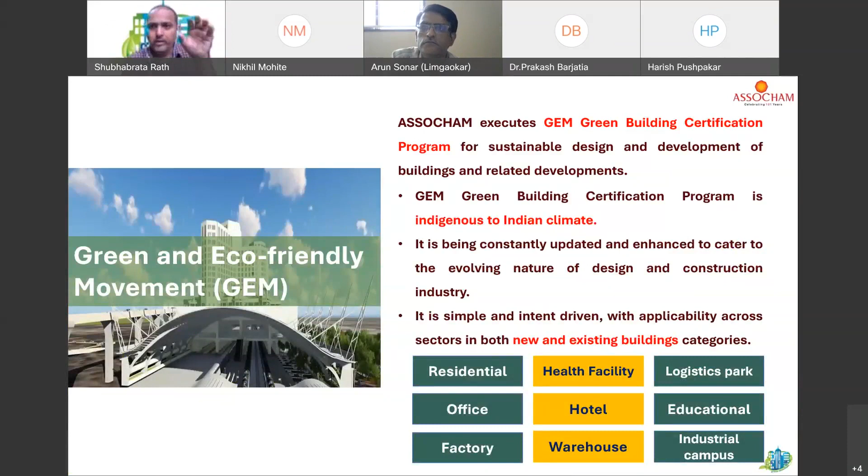Why are we trying to do it? What is the impact of energy in it? I will come to that part in a while. It is compliant with ECBC, the Energy Conservation Building Code, an Indian indigenous code, a very good guide for all of us. The 2017 edition, the latest one, along with the National Building Code 2016, helps us implement green building sector standards in sustainability, energy and water efficiency.

You can see there is prominence given to the second part - fire and life safety, more green area, human comfort, fresh air. Even fresh air has a connection with energy, directly or indirectly. Indoor air quality is the same thing, and even daylight has a connection with energy. So energy is everywhere - it's about optimization of nature.

The United Nations SDG goals also place a lot of emphasis on this, and GEM is being continuously improved to align with the United Nations SDGs 2030, with energy being a part of it.

The GEM green building advantages - like I told you, it is an indigenous program by a century-old apex industry chamber. GEM is the first indigenous program based on ECBC and NBC. It is an affordable certification program, at least 30% less than other existing programs in our nation. For sustainable buildings, any extra cost you pay can be recovered in 3 to 4 years, with additional costs of 6 to 10 rupees per square foot maximum. There are also regular interactions between GEM and project teams, even post-certification.

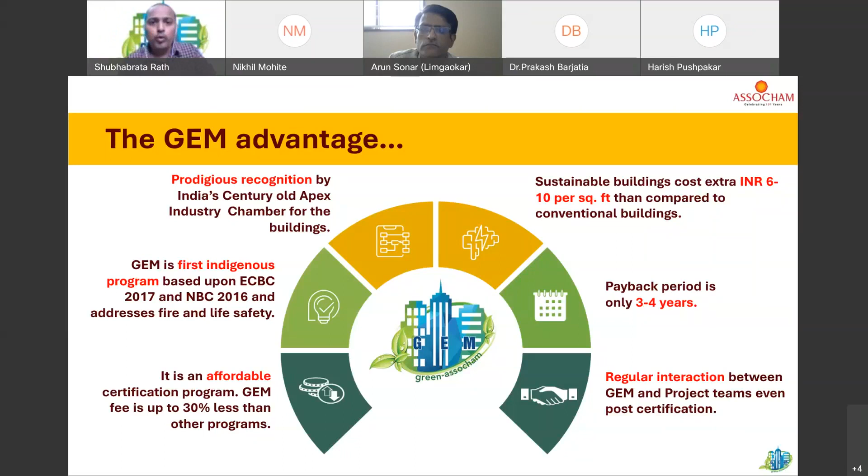That's what we are committed to for everyone going for this certification. It is listed by CRISIL Green Building Rating Agencies. We have GEM level certifications for different requirements, GEM 1 to GEM 5, and energy - I won't go into that detail - but there are a lot of principles in our program directly related to energy audit and commissioning. We recognize energy audit as a need of this hour.

So ASSOCHAM's GEM Green Building Certification Program has been empowered with Rajasthan Building Bylaws for extra FAR incentives, and some other states are also coming up in the near future.

So the certified green projects - we have a lot of projects across diversified sectors, maybe hospitals, hotel industry, office industry, residential programs. There is DoubleTree Hotel, Times Square Mall, PVR Cinema Hall in New Delhi, all GEM certified. I can show successfully delivered projects.

This is a glimpse of illustrative projects - healthcare, a green school, land port terminal at Kartarpur. It's not only a diversified portfolio in terms of types of buildings, but also diversified in terms of locations in India. We can do this everywhere because energy is not confined to cities only - it goes into all details of our life, all sectors and places, in all states, and even in villages.

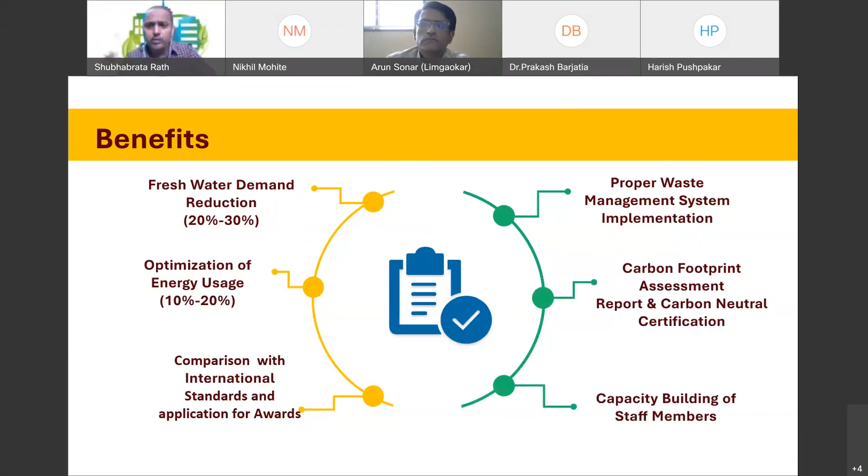So we have the benefits of all the audits, not only energy audits, any sustainability audit, we call it green audit for universities. In the green audit, we have waste audit, water audit, carbon footprint audit, and energy audit. All this helps in certain ways, tangibly and non-tangibly, both ways. We have a pledge, PM Modi made this pledge, that let us all pledge to create a green and environmentally sustainable country. Of course we should, and that's what we're trying to get at.

Typically, energy audit consists of identifying and developing modifications in the current energy consumption scenario of the building. Our aim is to reduce the energy use and cost of operating the building. Our goal of energy audits is to improve the energy performance of the building and reduce consumption of fuel and electricity that we use in our residential buildings.

Energy audit, or energy analysis, is the first step to making our commercial facility more energy efficient. Normally when we conduct an energy audit, we can either do it at a more broader level, or we can go in depth. As we perform more and more measurements and go more in depth, we can find more solutions to conserve more energy.

At the end of the energy audit, we try to find the conservation measures, and these conservation measures are normally low cost or no cost options, or maybe capital intensive.

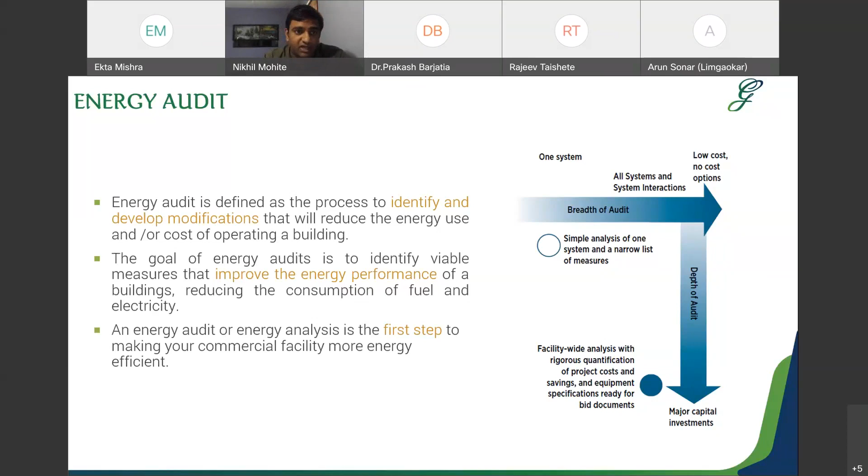The energy utilization index is first - during the energy analysis of buildings, we try to get historical data of the building and understand how the energy consumption of the building is. To understand the historical performance of the building, we try to use the energy utilization index, which is against the energy consumption.

We try to use influencing factors such as square meter of the building, or factors which have effect on the energy consumption of the building, such as outside temperature. We try to map the energy consumption of our residential building against this influencing factor. That is called the energy utilization index.

When we say that buildings have the same energy utilization index, that means two buildings are compared with respect to the climate and with respect to the square footage of the building. So these are the energy utilization indices we use in comparison of the two buildings, and we can say who has more energy consumption, and compare the two buildings.

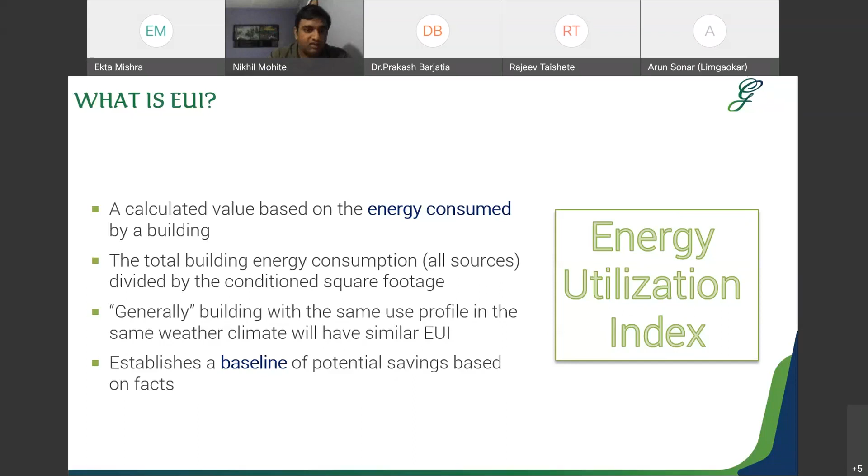Key elements to performing an energy audit: the first is benchmarking and analysis of the historical data, and the second is breakdown of energy use and analysis of the end uses. So in the initial steps of the energy audit, what we do is try to understand the type of the building, the principal use of the building.

If the building is used for 8 hours or it is used for 24 hours for residential purposes. What are the different types of energy sources that building is using? What are the different types of energy uses that the building has? What are the different costs associated with the energy uses?

These kinds of questions we come up with when benchmarking and analyzing the historical data, and then we try to understand what are the design conditions and the actual operations. We try to compare the design conditions and the actual operations, understand the operation and maintenance procedures in the first step, then compare it with the baseline. This is the first step about benchmarking analysis of the historical data.

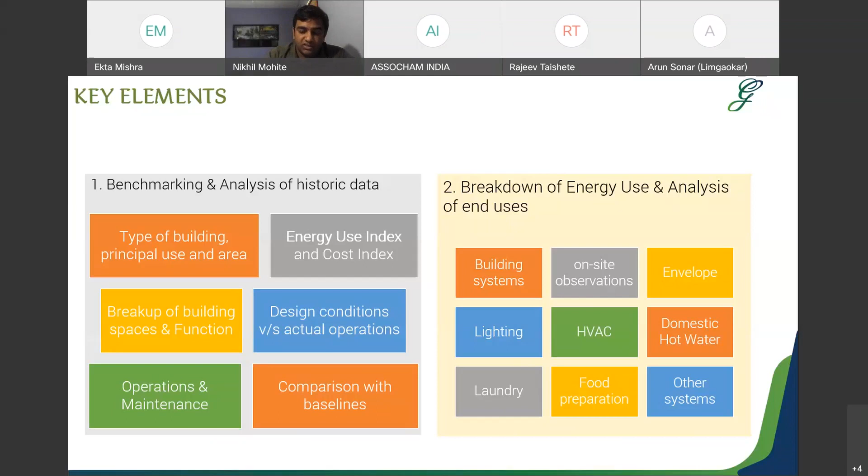We try to analyze, break down the energy usage of the building. And the third, well, energy audits, engineering and the economic analysis.

So once we have identified the historical data, then we have identified the breakdown of the energy consumption, then we go to the data analysis, and after analyzing the data, in the energy analysis we try to get information about the present energy use, and we also take into consideration the cost of the energy sources.

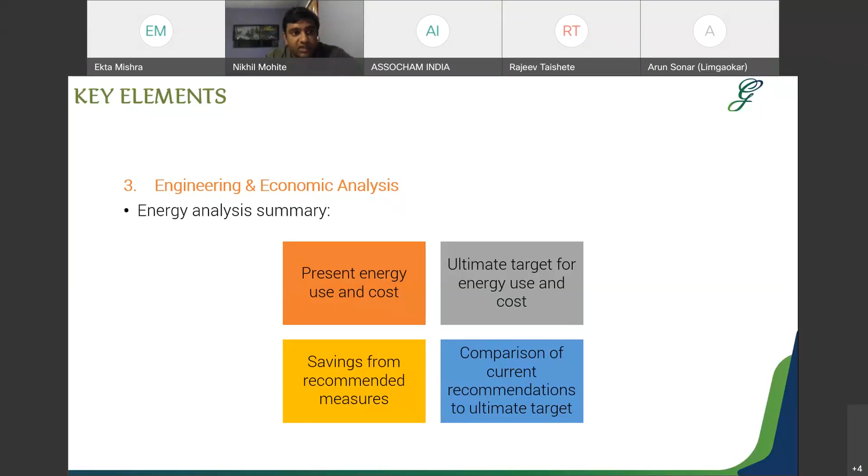So our ultimate aim is energy conservation, and we try to estimate the energy savings with respect to the energy efficiency recommendations.

So there are several frameworks that are available for conducting energy audits, such as ISO, International Standards of Organizations, then Bureau of Energy Efficiency from India, and ASHRAE Building Energy Assessment Professional, ASHRAE Building standards.

These standards have their own guidelines for conducting energy audits which we can use. For example, in the ISO 50001 energy management system family, the separate standard ISO 50002 is given to identify and has given the guidelines regarding conducting the energy audits. So there are several steps which we can follow, and we can conduct the energy audit as per ISO 50002.

Bureau of Energy Efficiency has also given certain guidelines regarding the energy audits, and the framework which Bureau of Energy Efficiency has given is that they have identified certain designated consumers, such as the manufacturing industries, and identified them as designated consumers.

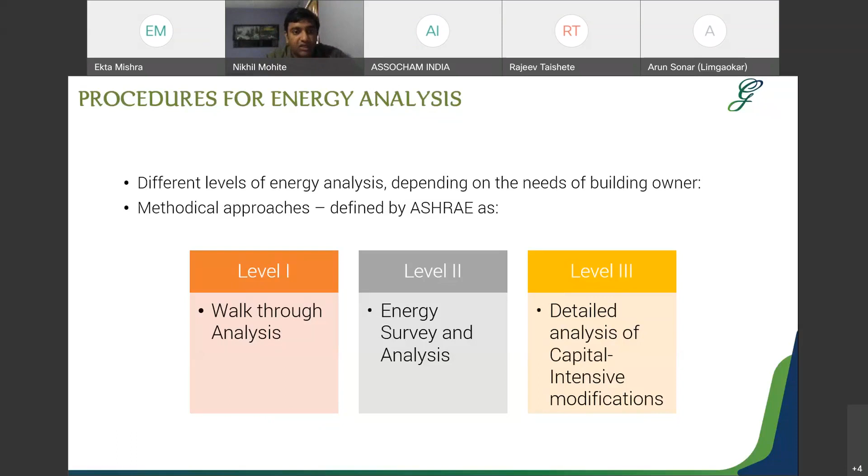But level 1 gives input that can be used in level 2, and level 2 inputs are used in level 3 energy audits at ASHRAE. So we'll try to understand in detail what level 1, level 2, and level 3 are.

As I mentioned, for each level the energy audit process is the same. So initially, we will try to review the utility data.

Before visiting the site, we'll try to examine the utility data regarding energy consumption, mainly from the energy sources used in residential buildings, such as electricity or diesel consumption. We'll try to get this information for as long as 3 years to understand the energy consumption pattern of the building. The more data we have, the better we'll understand the pattern of energy usage and the changes happening in energy consumption on a broader level with respect to energy sources.

Before visiting, we'll also try to get information regarding the single line diagram or the building systems diagram, and find out how the building was designed or how it is currently used. With respect to the single line diagram, we'll try to understand the energy sources, the energy consumption, the energy consumers at the demand side, and how energy is distributed in the building.

So for level 1, level 2, or level 3, the first step for each is the preliminary review of the utility data. On the right side, with respect to the initial energy review, you can make a graph with different categories such as interior lighting, cooling, heating, exterior lighting, and fans. You can use such categories to analyze the initial data.

The second step in each level is the site assessment. Once we are done analyzing the initial data, we visit the site, and in the physical assessment of the facility and operations, we try to meet with the key operations and maintenance staff. The complexity and depth of the site assessment depends on whether you are conducting level 1, level 2, or level 3.

Level 2 will be more focused on the equipment side, and we'll try to get a different view on equipment usage. We'll try to collect data with respect to energy consumption, such as energy measurements for the equipment. While doing the site assessment, we also get the construction details of the building envelope.

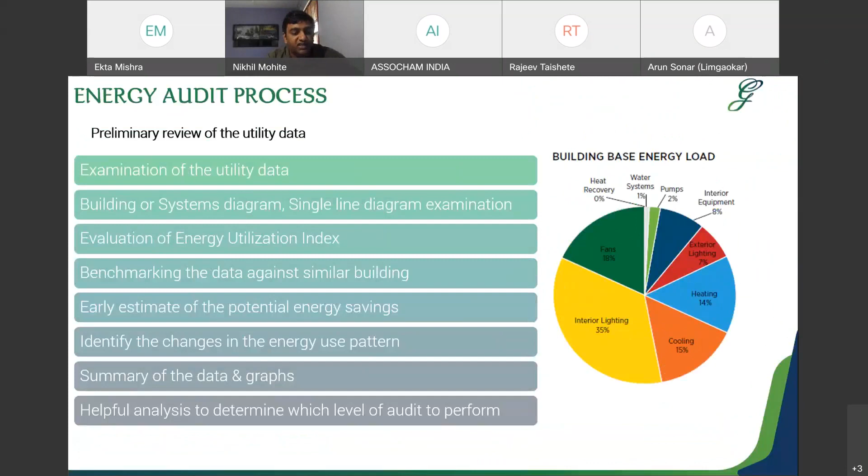So after review of the utility data site assessment, we go and do the data analysis. Once we have the measurements, the data monitored, in the second step, we come back and we do the data analysis and we try to find out what is the performance of the actual building.

So the performance related with the equipments that the building has been using. In this case, what we do is we try to understand the performance of the chillers, pumping systems, or the fans, and we try to understand the efficiency. If we calculate the efficiency of these equipments, we compare these efficiencies with the rated parameters, so what exactly we are getting.

So energy audit data analysis is nothing but what is coming in and what is going out. For most equipments, what is coming in is the electrical energy, and what is going out, such as in case of pumping system, is the hydraulic power. When we talk about the fans, what is coming in is the electrical energy, and what is going out is the fan power, air power.

So in this way we can analyze the equipments, and we calculate the efficiencies of these equipments, and we compare them with the rated parameters, and we try to find out different ways of conserving energy with respect to these equipments.

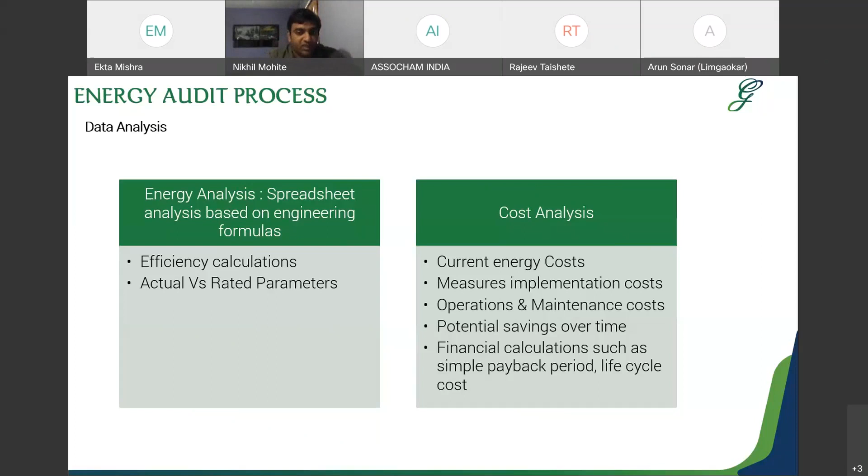So the last step for the energy audit is preparing the energy audit report. Once we are done with the data analysis and preparation of energy efficiency measures, the identification of energy efficiency measures, we try to put everything in our audit report.

And we talk about the future, what kind of steps the building owners has to take to meet the energy saving and financial goals. So we give the summary of building's current condition and energy use, and this will be coming from our initial preliminary analysis.

And then we discuss about the list of recommendations, energy saving recommendations with respect to low cost and longer term energy efficiency measures. And we also discuss about monitoring of the energy consumption, energy utilization in the future, how the building can monitor the energy consumption.

We have seen in the buildings also that many times buildings are only monitoring the energy consumption and there is no system at all. Whatever the building has, the building might have the system in place for collecting the data. They might not have automated data generation, but they have personnel working on collection of the data. So they will be only monitoring the energy consumption.

They are collecting the data, and they have the data for the last couple of years or 3 years, and there is nothing. They have not done any energy analysis with respect to that data generated, and they have not come to any conclusion, just because some company has advertised them about doing the data monitoring, they have been following this. So in the energy audit report, it is also important that while monitoring the energy consumption, what kind of energy utilization indicators to use, and try to understand the energy pattern of the equipments and come to the conclusion whether the equipments are running efficiently, or the building is running efficiently or not.

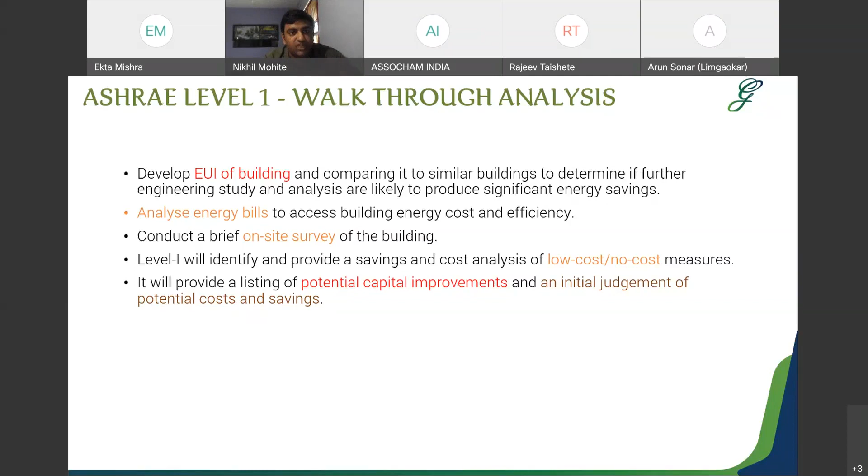In level 1 walkthrough analysis, we only collect the energy bills and try to analyze them. We conduct a brief on-site survey of the building, and we try to get the low-hanging fruits only - the energy efficiency measures which are low cost and no cost. This is only our initial judgment when conducting ASHRAE level 1.

ASHRAE level 2 is a little more complex, and this is where we go with the team and conduct the energy survey and energy analysis also. We try to break down the energy use with respect to different categories, and try to see which category has the major energy consumption, such as HVAC, lighting.

So when we categorize the energy consumption on a broader level, we get to know who has the significant energy consumption, and we try to attack the significant energy consumers.

In the ASHRAE level 2 audits, we also consider maintenance and operational activities, and try to understand different activities they are performing with respect to their energy consumers, and what kind of maintenance procedures can be modified or altered with respect to energy consumption.

Once we are here, we'll be conducting more detailed cost benefit analysis of the energy efficiency measures we have identified, in a more detailed way, and we'll also try to understand the operational maintenance activities for these kinds of measures.

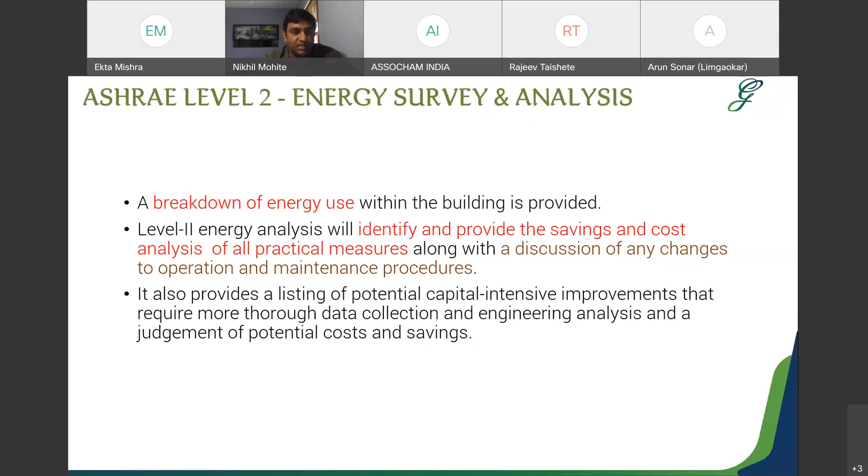Here we will not include, but we'll just mention the capital intensive projects which require more capital and more data to analyze, to come to the point that there are some energy saving opportunities. This input from level 2 we'll use in level 3.

So what level 3 is, is the detailed analysis of capital intensive modifications. Once we've identified a few capital intensive modifications, we'll try to monitor the energy consumption of certain parameters and equipment.

With respect to the capital intensive identification of the energy conservation measure, we try to understand the load, the energy consumption pattern - whether it's changing with respect to load, or how the energy performance of particular equipment behaves. That's how we do the capital intensive modifications to realize the energy saving opportunities.

We'll try to gather as much data as possible, and do the monitoring for a certain period of time. We'll get this data and then analyze it, and then come to the point of cost benefit analysis, doing the cost and energy saving calculations.

So this is a brief summary of the level 1 audit report, level 2 audit report, and level 3 audit report. In the level 1 audit report, as we can see, there is not much - it is only a walkthrough survey.

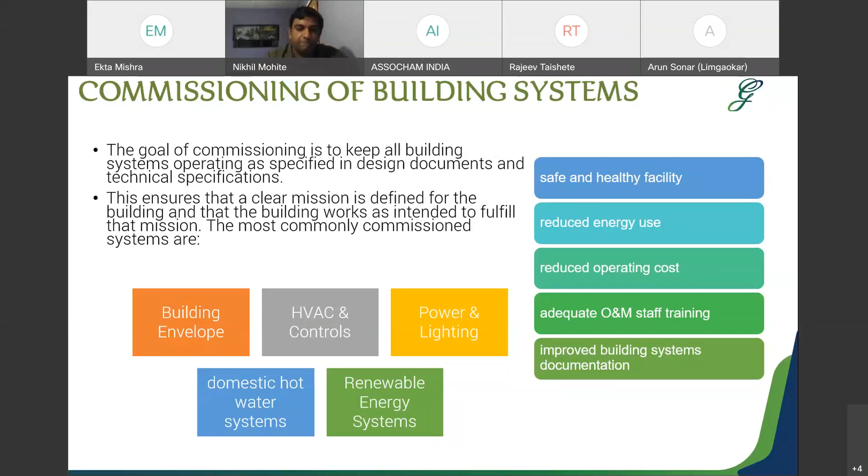And it also improves the building system documentation. Sometimes what happens is, once the building comes into use, after a few years there are lots of changes, and because there are lots of changes no one has really updated the documentation. When we do the commissioning of the buildings, we come to know what is the current scenario of the building against the design scenario from a few years back, and we can update the documentation.

Commissioning processes mainly include different types of commissioning: initial commissioning, ongoing commissioning, and retro-commissioning. The initial commissioning is normally done for newly constructed buildings.

It starts with the commissioning planning, and it starts with the basis of the owner's project requirements. So the owner gives the requirements to the design team, and then they prepare this basis of design, and then the actual process starts - the contractor comes into the picture.

They order the equipment that is required, and we do the startup procedure. So this process starts up, and then the commissioning provider also comes into the picture. The commissioning provider will review the design and the installations, and will also make sure of the startup of the components and systems.

Then they will do the performance testing, to check whether the equipment is running accordingly, and then they will prepare the system operation and maintenance manual. They will train the personnel, and then they'll also see if the system is responding to seasonal changes, and they'll do the first operational review after 10 months of operation, and it will go into the ongoing commissioning. So initial commissioning is done mainly for newly constructed buildings.

The building commissioning process starts with commissioning planning, and in every step of the process - the planning, the design, the construction, and the post-construction of the building - a commissioning provider has a role. In the planning stage of the building, the commissioning provider comes into the picture and develops the plan for the commissioning of the various equipments.

In the design stage, he analyzes the documentation prepared by the design team and the contractor, checking whether the document is aligned with the owner's project requirements.

And in construction, when the equipments are installed in the building, he will do the functional performance testing of the equipments, checking whether they are working as per the intended use with respect to the owner's project requirements.

And in the post-construction stage, every 3 to 5 years, they can again go for the commissioning.

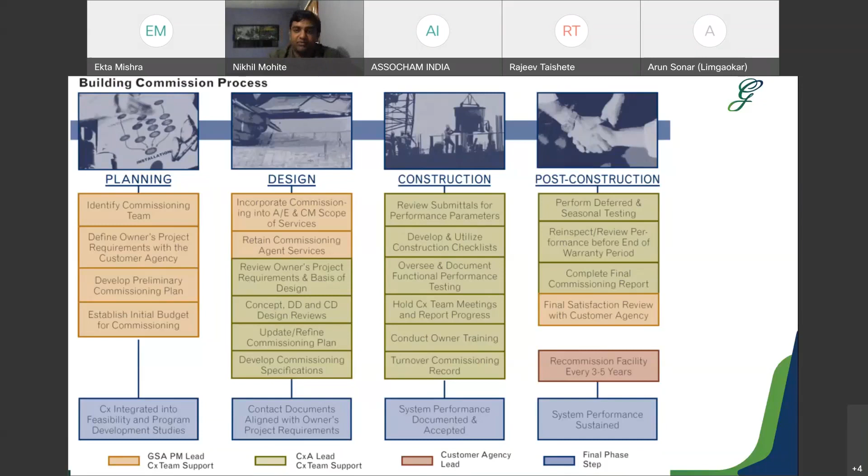So why should we go for the commissioning? Because as we use the various equipments such as motors, fans, and chillers, they will wear down with use, and there will be some sort of unbalancing or misalignment, causing various problems such as vibration and noise.

The controls and the sensors, whether they are performing as intended, as per the design, will also deviate from their intended use over the years. We also need to see whether proper controls are given to the sensors.

If the building is old, or as old as 10 years, there will be many changes in the building with respect to the ducting, for example. We also need to see if the changes in the building are included in the documentation.

Over time, indoor air quality issues can worsen, providing an uncomfortable environment for the occupants. This is not good for the benefit of the company when indoor air quality issues are not taken care of. Such issues we can also take care of during commissioning.

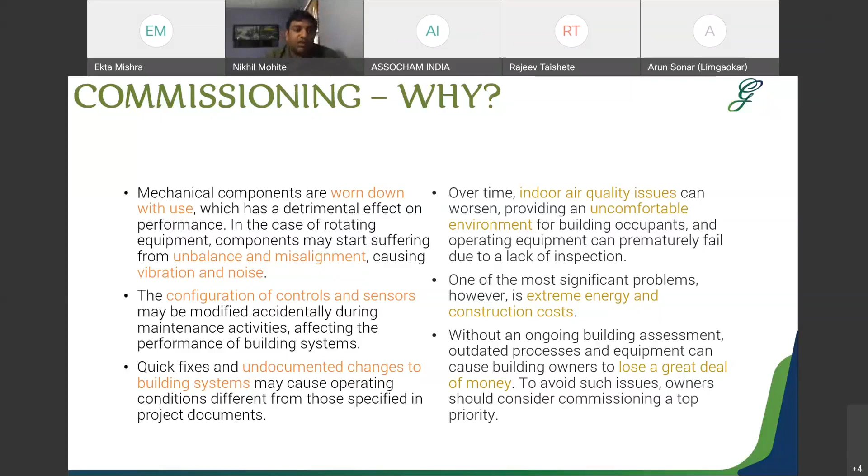After the installation reviews and conducting the functional performance testing, various issues will be identified. They will be taken care of by the contractor or the equipment provider.

That will be the end of it, and then we'll start preparing the operational and maintenance manual, and train the operation and maintenance personnel with respect to the commissioning output and how the system should be running. We'll do the training as well for the staff.

After this, in the first year of operation, we'll do the seasonal commissioning as well, checking whether the systems and equipments are responding to seasonal changes. Once post-occupancy, we'll try to do the operational review after 10 months. This will be the end of our initial commissioning, which will be the input to our ongoing commissioning.

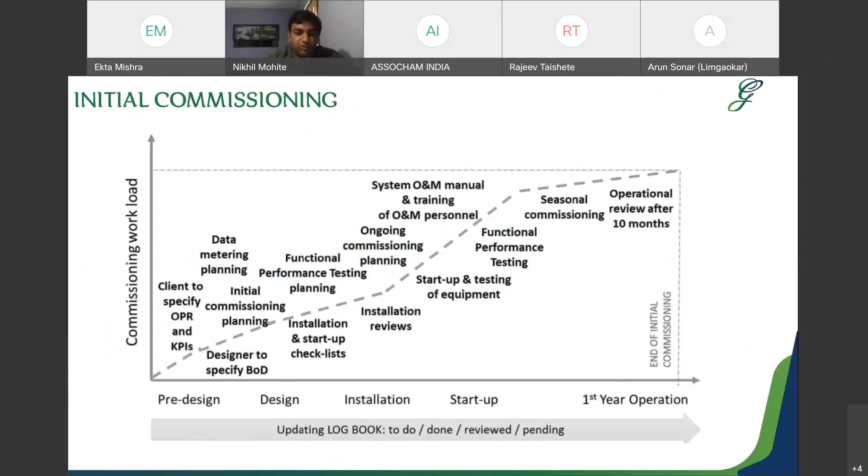So we'll go into the first year of operation. The systems that we commission during the initial commissioning, the retro commissioning, or the ongoing commissioning are mechanical ventilation systems, such as ductwork cleanliness, whether the insulations are in place, and the operation of the AHUs and outdoor units, whether they are performing as intended.

Then we'll try to understand the operation of exhaust and supply fans, and on the cooling side, the performances of chillers, cooling towers, pumping systems, window AC air conditioners, split air conditioners, VRF systems, precision air conditioners in case of data centers, and heating systems if the residential building has boilers or heat exchangers.

We'll also see the control side of the building management system, measurement sensors, energy meters, whether room conditions like air temperature and CO2 monitoring is being done, or with portable instruments we'll try to understand what CO2 level is being maintained in the building.

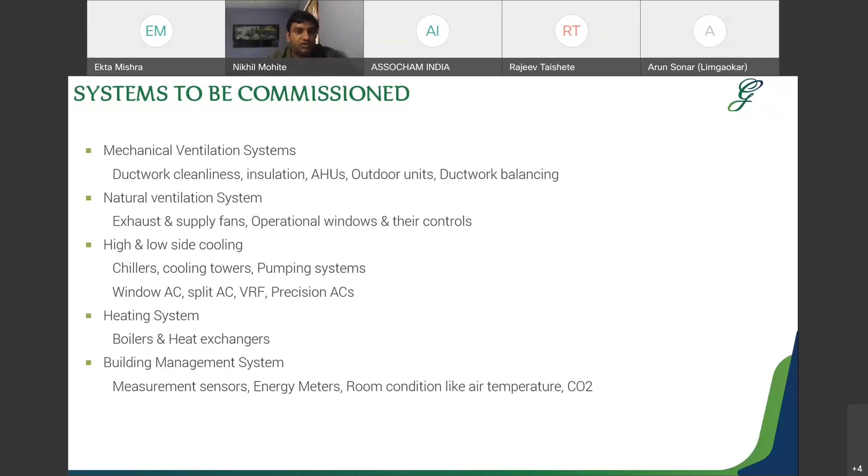If it is an office building, then at the start and at the end of the office day, we check if this is being maintained, and if the fresh air fans are working properly. So these are the systems we commission during the commissioning.

As mentioned earlier, initial commissioning activities start with the owner's project requirements, then we'll try to identify the key performance indicators, then the basis of design is prepared.

Then the team will nominate the commissioning provider. The commissioning provider will do the commissioning planning. Then the data metering will be done.

After the contractor submittal review confirms the equipment is in place and performing as intended, installation and inspection of the system components will be done.

Once the startup is done, functional performance testing is carried out. Various issues are identified, whether the equipment is working as per its intended use, and once they are rectified, the commissioning provider along with the contractor will prepare the operation and maintenance manual and system operation and maintenance manual.

Then they will train the staff and personnel, and seasonal commissioning activities will also be carried out. There will be one operational review after 10 months of operation and occupancy of the building. So that was the initial commissioning.

Then we'll go for the retro commissioning. If a building, from its initial erection, is old - far more than 10 years old - and it was never commissioned, as we discussed before, what can they do?

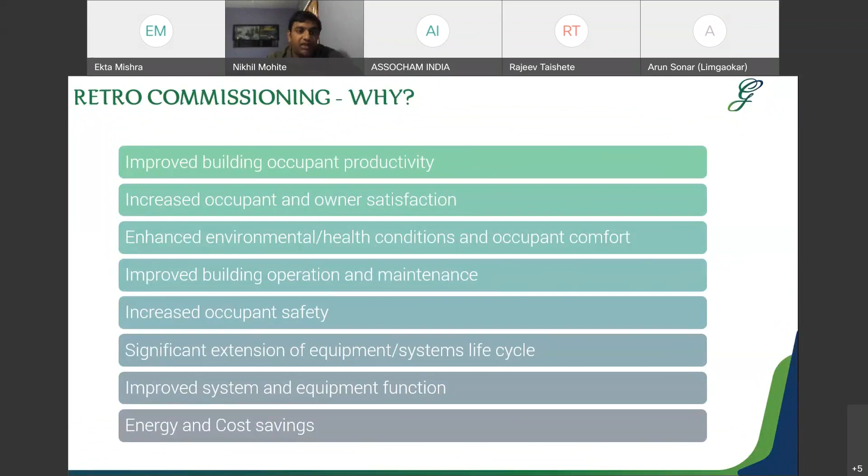So why do retro commissioning? The several advantages are: improved building occupant productivity, increased occupant and owner satisfaction, enhanced environment and health conditions, and occupant comfort. As we discussed before, if CO2 is not being maintained properly, it will make the staff uncomfortable working inside, so that needs to be checked.

Improved building operation and maintenance - whether certain checklists are being monitored by the staff or not. Occupant safety is increased, along with extension of equipment life, improved system and equipment functions, and energy and cost savings. So improved health of the building is the main reason why we conduct retro commissioning.

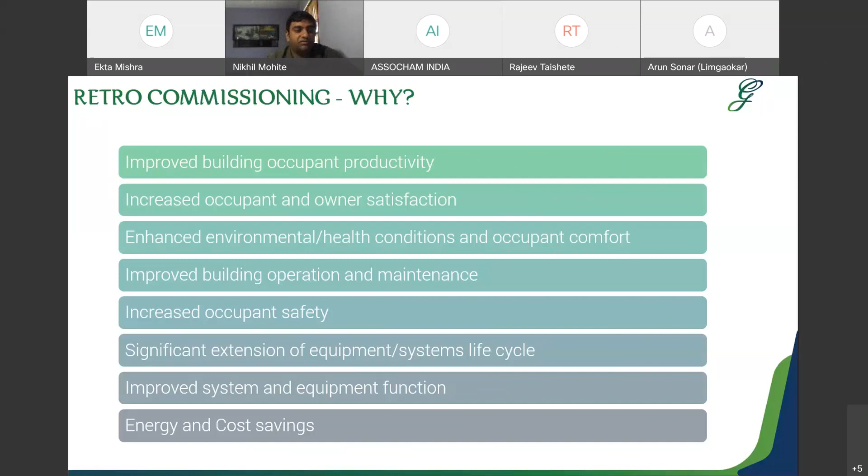The third is the ongoing commissioning. This starts after the initial commissioning, after a few years. The ongoing commissioning is more about data collection, based on ongoing collection and analysis of the energy data. So the data metering step which we followed in the initial commissioning comes in handy for our ongoing commissioning. The existing building automation system generates a lot of data, and this data is analyzed in ongoing commissioning to reduce the number of errors being made.

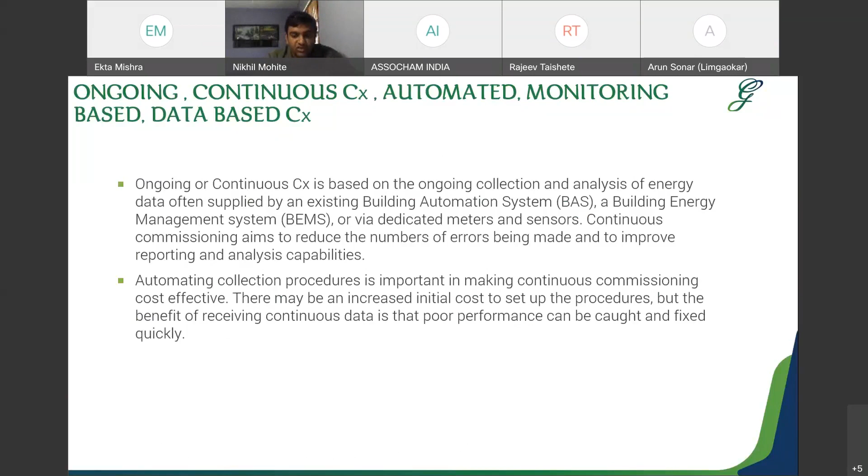So when to consider ongoing commissioning? When was the building last commissioned? Once we do the initial commissioning, and after a few years we have not commissioned the building again, we can consider this option.

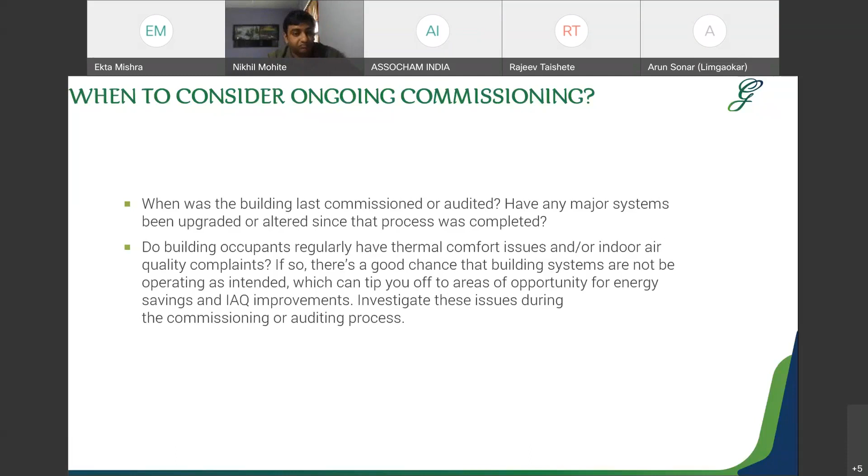If there are many major system upgradations or alterations since the process was completed, and there have been any issues identified by the occupants, with continuous complaints - such as thermal comfort issues or complaints from staff - there is a chance the building is not operating as intended, and we can investigate these issues during the ongoing commissioning.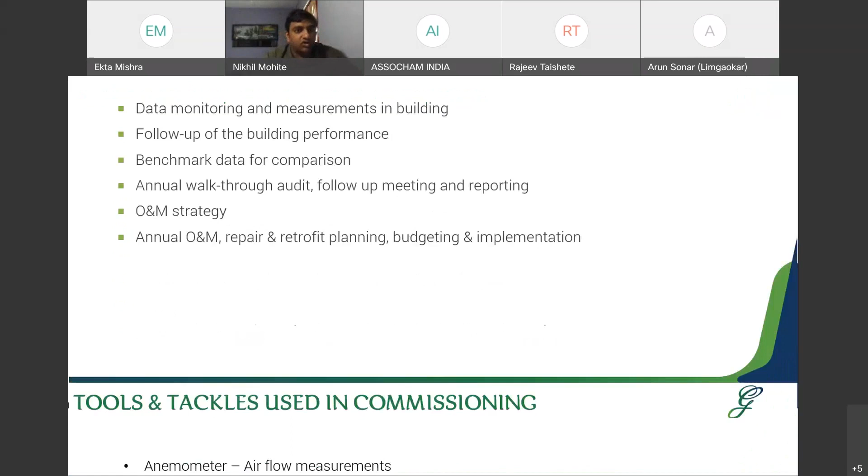The various tools used in commissioning are very similar to energy audit. To conduct airflow measurements, we use the anemometer. For analyzing energy consumption, for measurement of current and voltage, we use a clamp meter. For temperature measurements, for chillers and cooling towers, etc., we use a digital thermometer. To understand pumping systems, we use water manometers to measure line pressure of water.

We also use the pitot tube to understand static pressure measurements. Then the tachometer, to measure the rotations of the motor, etc. And to understand the vibrations of various equipment, we use a vibration meter.

The commissioning agent is the commissioning provider, who has a larger role during the commissioning process. From the initial stages of the pre-design phase, commissioning agents are part of the overall process. From the early design phases, they review the construction documents, comment on construction submittals, and review the construction on the field. They also participate in these processes.

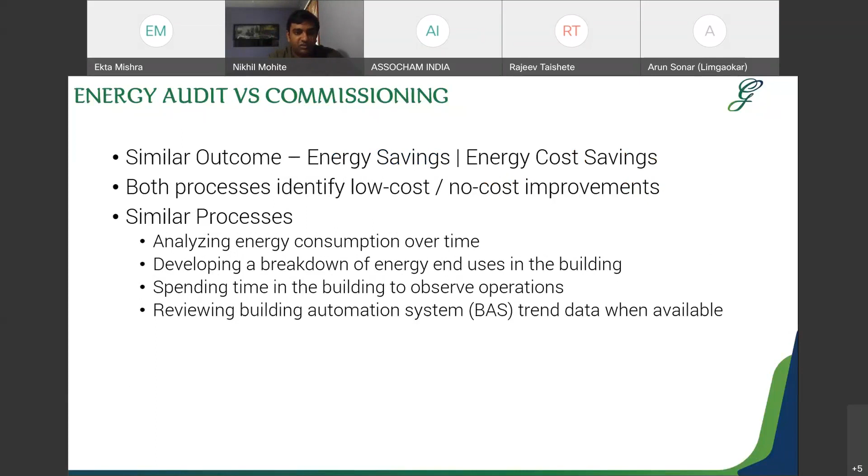The processes also include similar steps, such as analyzing energy consumption over time, developing a breakdown of energy use in the building, spending time in the building to observe operations, and reviewing the building automation system. These are the similarities between energy audit and commissioning.

The main difference between the energy audit and the commissioning is the functional testing we do with respect to the instruments - something we do not do in the energy audit. When doing functional testing of certain equipment, we want to see whether they are working as intended, whether the blowers, if present, are switching on or off with respect to the temperature inside the building.

When considering an evaporative cooling system, for example, if there is a pumping system pumping water inside the evaporative cooling system, we check whether it responds to changes in the temperature inside the building. Such functional performance testing is done in the commissioning process.

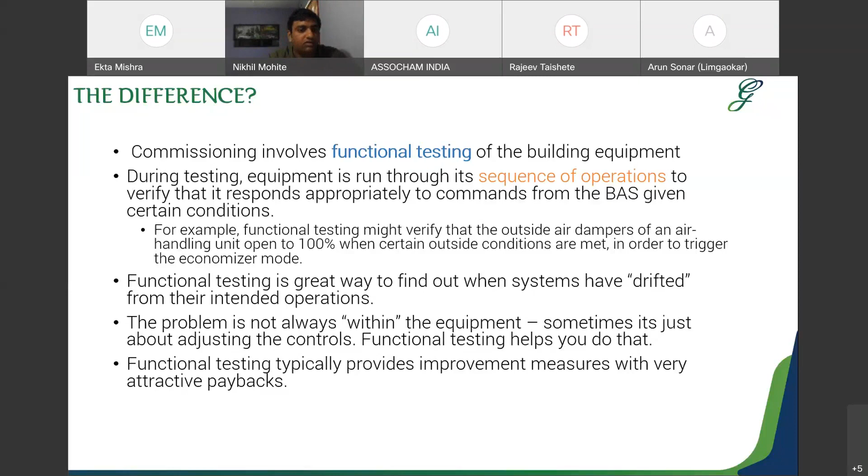The objective of the energy audit and the retro-commissioning is identifying the same objective: identifying cost-effective upgrades. In retro-commissioning, we try to understand whether the systems are performing as per the intended level of performance.

The primary focus during energy auditing is identification of the projects which will generate energy savings. In the commissioning process, we try to understand the processes, the building controls, and operational measures, and whether they are giving the same output which was intended.

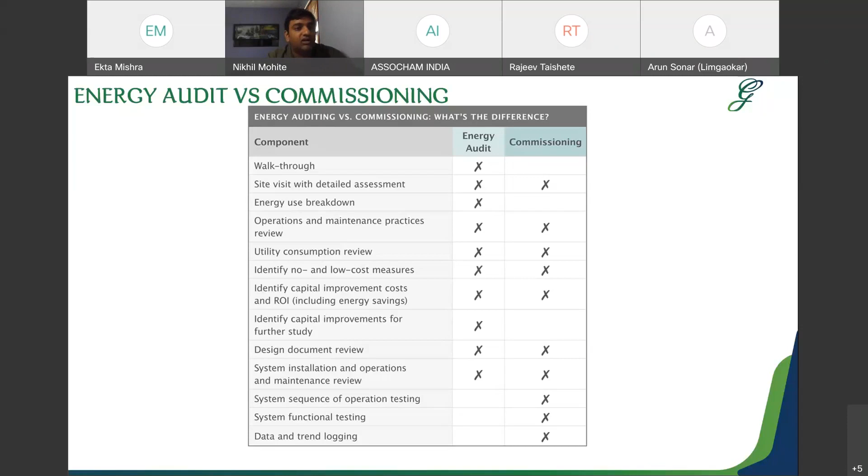In the process of energy audit versus commissioning, the steps we follow are very similar, although the energy use breakdown is more important with respect to energy audit, and not so much in the commissioning process. Capital improvements are a requirement of our level 3 energy auditing, but not as required in the commissioning process. System sequence of operation testing, system functional testing, and data and trend logging are more important in commissioning, as we discussed—sequence of operation is followed to check whether the controls are operating as intended.

So I'll go to the case studies. One case study is of fans or blowers, and how we conduct the energy audit for fans or blowers. When conducting the energy audit of the fan, what we try to understand is the performance parameters of the fans or blowers.

To come to a conclusion on the performance of the fans or blowers, we have to measure, in the field, what we try to understand—as initially discussed, the energy audit is mainly about what is coming in and what is going out. In the case of fans, it is the air power, and to understand the air power we have to measure the airflow inside the fan. The second parameter we require is the static pressure difference created by the fan. These two values give us the information regarding the air power, and what is coming in is the electrical power.

We try to get these two pieces of information while conducting the on-field study, using the clamp meter, as mentioned before, to measure the input electrical power. On the other side, to measure the air power, we use the pitot tube to measure the static pressure difference, and we use the anemometer to get the actual airflow in cubic meters per second.

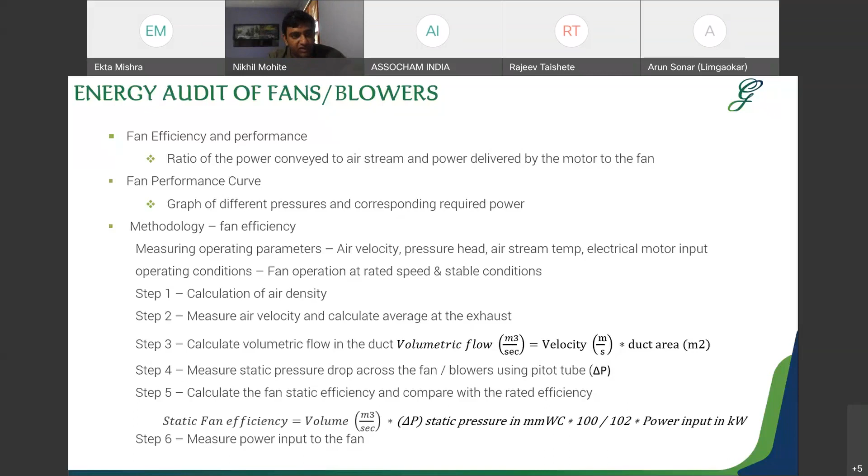Once we have the static fan efficiency, we'll compare the operation with the rated operation. We'll do data analysis with respect to the energy auditing, trying to understand whether we have chosen the right fan—whether the fan is undersized or oversized.

We'll try to reduce the system resistance and move the operation of the fan closer to the best efficiency point. In this case, we try to understand the fan performance curves and where our fan is operating at the moment—whether the operating point has moved from the best efficiency point we had when we installed it before. We'll try to make changes in the operation of the fan and move the operating point back to the best efficiency point.

Different ways of doing this include using a damper, inlet guide vanes, or a VFD. As you can see, on the power consumption side, when we change the rotation of the fan motor, we can see changes in the power consumption also. So this is basically the framework for analyzing the fan's performance with respect to the energy audit.

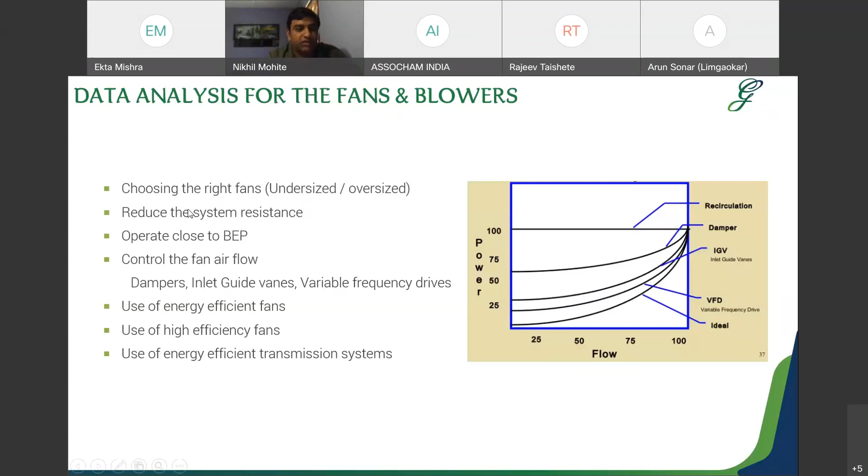We'll also see what we exactly do when commissioning the fans or blowers. In the commissioning phase of fans and blowers, we try to understand the startup manuals, the installation manuals, the sequence and control strategy, and the operation and maintenance manuals.

During installation, we look at the general installation and the electrical part, and we try to get the electrical parameters and see if they are less than the full load amperes. Such observations we do.

If there are controls given to the fans or blowers—for example, once the inside temperature is above 30 degrees Celsius, the frequency of the blower will change accordingly, and the fan will run at the highest frequency of 50 Hertz. As the temperature comes down inside the building, say to 27 degrees, the fan will start operating at 25 Hertz. So such kind of changes, if the fan or blower responds to them, such observations are more important in the commissioning phase.

So other observations we have made during the initial commissioning was in one particular building, the indoor units were interlinked with the fresh air fans. During the commissioning, we understood that the fresh air fans were not operating at all, and there was no interlinkage at all. This happened for each and every floor. The contractor had done some wrong electrical connections, and they were not operating at all. So this type of problem we can understand during commissioning.